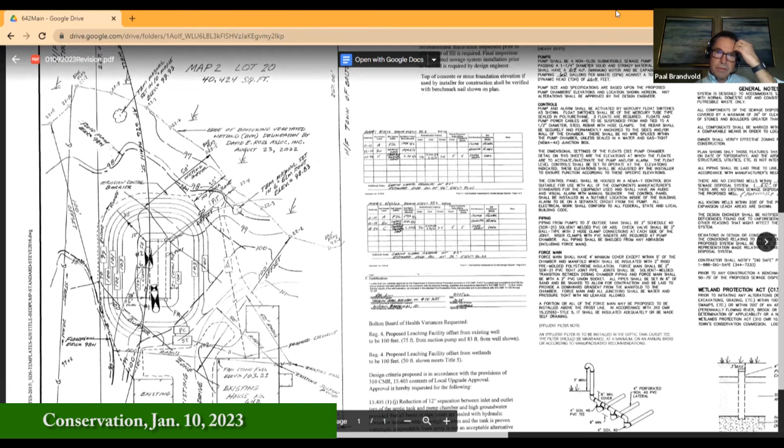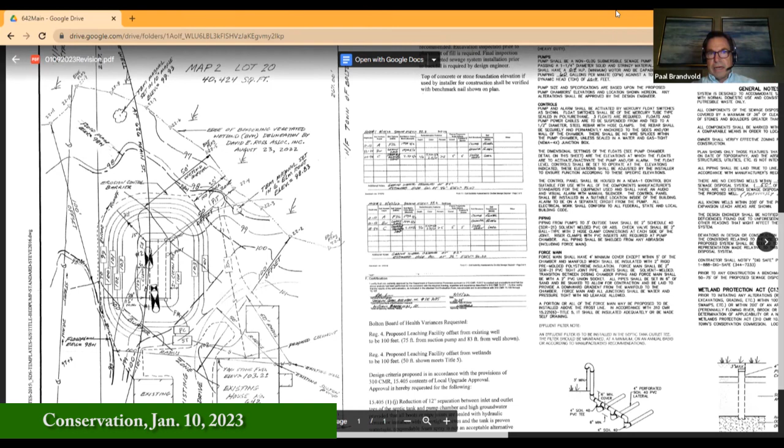Yeah, and I can just add, Brian, that when you look at this parcel, everything's within the 100-foot buffer, but the actual work is all outside of the 25-foot buffer, and the system itself, I think, is like 50 feet away. So there is some space there. I think it really comes down to the mitigation during construction would be my big question.

I don't know, Jillian, if you were on there, if you have any thoughts, or Rebecca, if you have a summary from the site visit? I wasn't able to attend. Okay, so the summary from the site visit is echoing exactly what they said.

I will provide one point of clarification. It's not part of construction, but they're decommissioning the pit, which is within the 25-foot area, so some remediation effort within that area is the only work taking place. But to that point, everything else is outside of the 25-foot area. There is the floodplain, and pretty much all the resource areas are really defined by topography on the site.

The only items I had asked on site about were continuing the erosion control barrier up to the garage, because the original plans stopped before the garage, and just thinking about limit of work and how the site may be manipulated during construction, where machinery will be ending up or any stockpiling material. It just made sense to basically close out that corner, because you're right on top of a floodplain area. So what I'm highlighting now is the extension that was put in. Yep, so that was included on the revised plans.

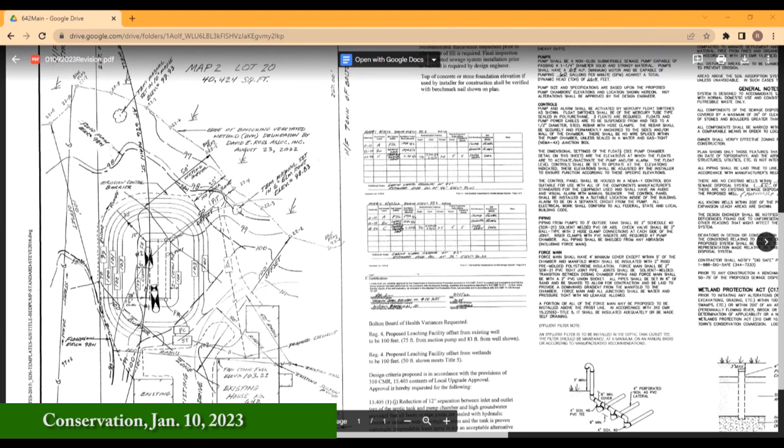Do I hear a second for that? Second. All right, all those in favor, starting with Paal, aye. Jim, aye. Jillian, aye. And Rebecca, and I as well. Who had the second? I'm sorry, I was still writing the condition. I believe it was Paal on that one. Yes. Oh okay, perfect, thank you.

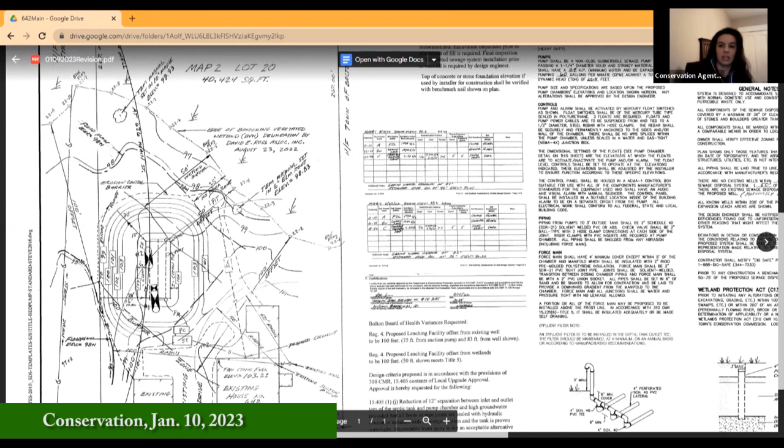All right, well, thank you very much. We appreciate you working with us on this. All right, thank you. Guys, take care. Thank you. How are we on time? You're good. Bye. I'll leave it out. Rebecca, it looks like we have about 2 minutes.

The only other update that I had was just that our volunteer land steward position is still open. And we are going to be starting, right now I'm coordinating the answers from the survey, the open space and recreation plan update survey, so that I will be coordinating a meeting, our first initial meeting, so we can start that process.

Have you gotten any feedback and or interest? I know we've announced the meeting and we're trying to get some people, but has anybody talked to you offhand that said, I'd be interested in doing this?

Yeah, actually, good, for the open space and recreation plan subcommittee, I believe we have a list of about 20 people who expressed interest in it, and about 10 of them responded to the outreach email I sent out asking for time and date availability. So it's encouraging. And then myself, the Parks and Rec coordinator, and the town planner, potentially the town administrator here and there, will be sitting on that subcommittee as well. So we have had some interest, and we may get more.

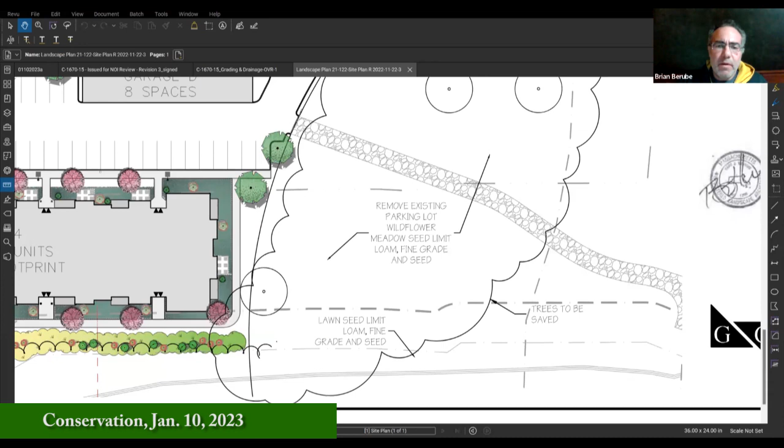So let me, if I may Mr. Chair, share my screen very quickly. Rebecca, if you could, thank you, and just confirm when you have that. I've zoomed in on it. This is the landscape plan that was submitted. You have it? Yep. So I'm just zooming in on that note - it is a wildflower mix. That's what we were proposing. So they are essentially affirming that.

Yeah, and I think the one thing we need to add to that is it needs to be a native wildflower mix or a native cultivar mix, but it has to be a native species - no invasives, no random wildflowers. That's fine, but Mr. Chair, you just said no cultivars. I'm not - I don't mean cultivars, I'm sorry.

Pollinators, native pollinators, native wildflowers - anything native is the key word that's missing. That would be great verbiage to add as a condition to reinforce this plan, and that's certainly fine by us, should you be willing to entertain it.

I'm sure you guys are amenable to that. Well, I shouldn't say I'm sure, but I'm assuming you're amenable. We are - you are sure, and you are correct. All right, good.

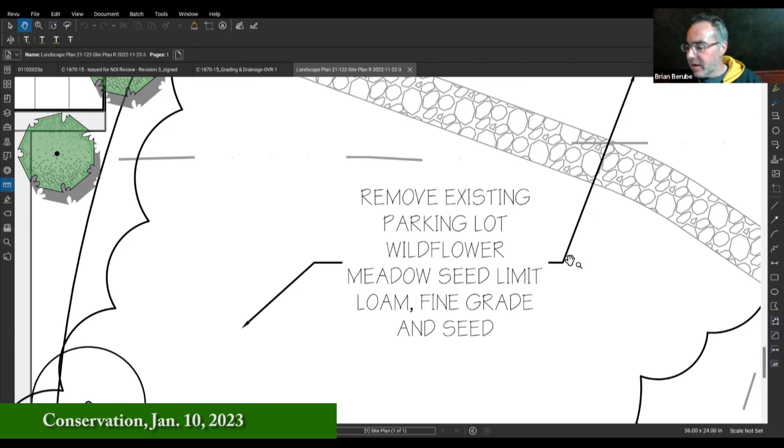I guess the only really outstanding thing for me, and I'll turn it over to commission members too, is that fire pond question. It's a tough one. If MEPA was so black and white on that, it kind of scares me, but I can see where that could have been an oversight. I know it is necessary - there's no way we don't need some sort of fire security there, and I don't know where else that could possibly happen.

I'm just saying, more to other commission members, having heard this whole discussion so far, I think I'm comfortable moving forward with it, how it's been drawn out. But if other commission members want to take time to either talk to MEPA or read through everything more, I'd love to hear your thoughts on it.

Could I add one thing before you open it to the commission? Just again, for clarification, the applicant does not need that pond as part of our fire management - we will have our own storage tanks. That pond is for the Bolton Fire Department now, or going forward, it will be only for the Bolton Fire Department for regional firefighting. So just to clarify the usage, it is not by us, it's by the town.

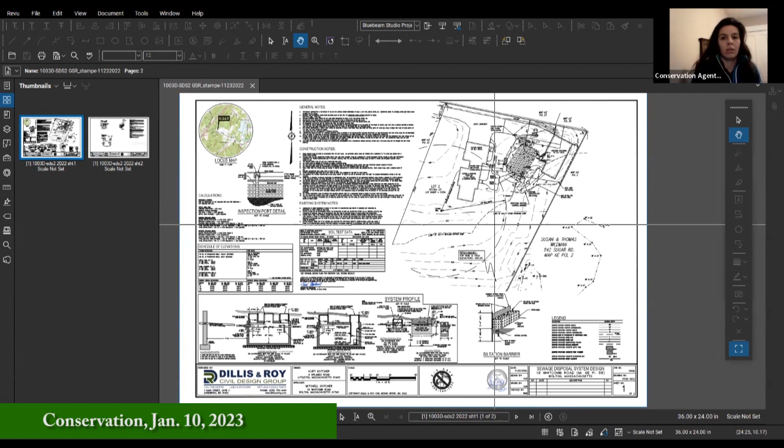Okay, can you see that screen, the plan? One second here. Okay, yes, we can see it, Greg. Okay, everybody can see that. Okay, great. So the applicant, again, as you stated, is Mitch Dutcher. The property is 19 Whitcomb. The existing house was built nominally 10 years ago

with a well and septic system. Mitch approached us a few months back, interested in building a garage structure in the back corner of the property, which is located within the outer limits of the buffer zone. I'll go over that in a second, but I just want to give you an overview of the site.

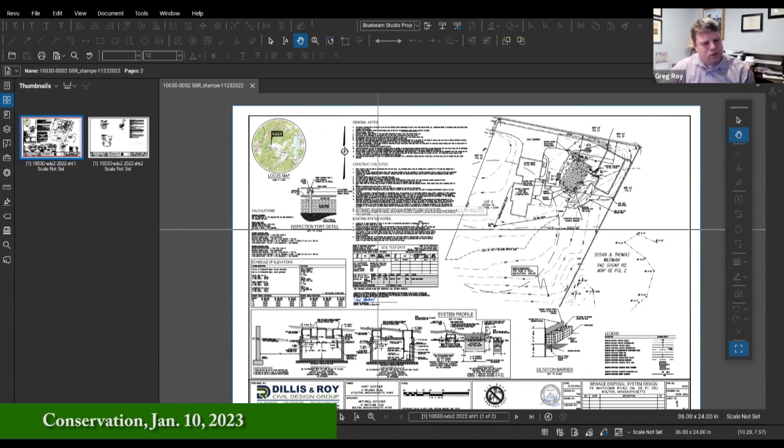So it's a little bit difficult to see here, but Whitcomb Road is actually over in this part of the site, and Sugar Road is down on the bottom of the page, oriented on the plan view. The lot actually has frontage on Sugar Road, that's where it derives its legal frontage, but there's an access easement for the driveway that comes in through the abutting property, the Damon property. I'm not sure the address, but that's why it has the address off of Whitcomb Road, just for everybody's benefit. So if you were to take Whitcomb Road, you would pass a house on the right, and then the driveway would be the second right as you go into Whitcomb Road, just so you can visualize that.

So the applicant, I'm going to zoom in here. The applicant is proposing to construct a garage building on the property with an associated driveway access in this location here.

The proposed structure would actually be over where the existing septic system is. So this project will necessitate the construction of a new septic system.

We'll have to relocate the leaching field to accommodate that construction. The location of the barn, as shown on this plan, required a dimensional variance, and the applicant has already secured that variance through the Zoning Board of Appeals. So that process is done.

As I mentioned, we also need a Board of Health sewage disposal system construction permit, and that application is also pending before the Board of Health. We did some additional soil testing back in late summer to facilitate the relocation of the system, and that application is before the Board of Health currently.

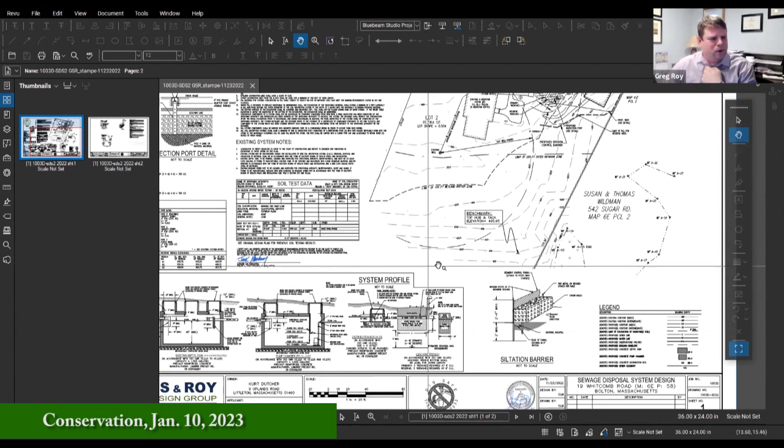There are two resource areas in play here that impact the property. If you picture driving down this location of Sugar Road, there's a perennial stream across the frontage of this property, so there's an associated riverfront area. It's located along this large dashed dot line here that comes across. You can see here I have the limit of the 200-foot outer riparian zone.

All of the work we're proposing for this new project is located outside the riverfront area. So although we have riverfront area on the site, we are not proposing any work within it. I just wanted to note for your reference that we do have riverfront area on the property.

There's a wetland system, some of which exists adjacent to the stream, and some off-site. You can see these wetland flags here, A17 through A23. It's wetland flags A21 and 22 that really caused the buffer zone to overlap the proposed work area. The closest point of the barn, I believe, is about 75 feet from the wetland area.

We would of course be proposing an erosion control barrier, which is shown in this heavy dashed line. No, here—that's not us. Okay, heavy dash line here.

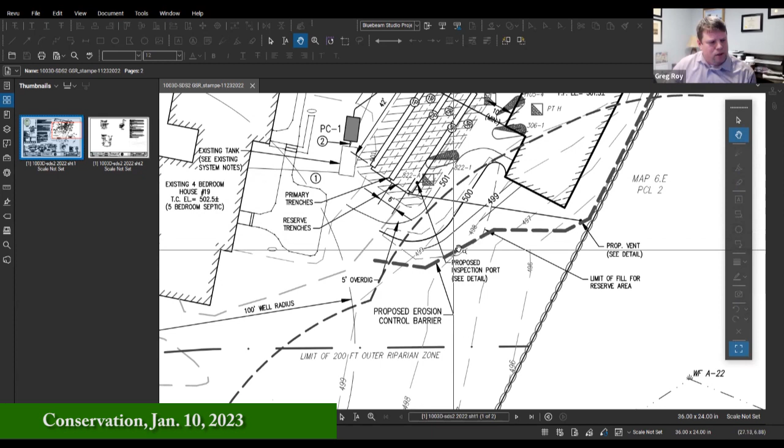A very small amount of the breakout grading from the new septic system, between the erosion control barrier and the limit of the buffer zone, would also be within the buffer zone area, but none of the leaching system components would be within it. So all of the leaching trenches, both for the primary and reserve area, would be located outside of the 100-foot buffer zone.

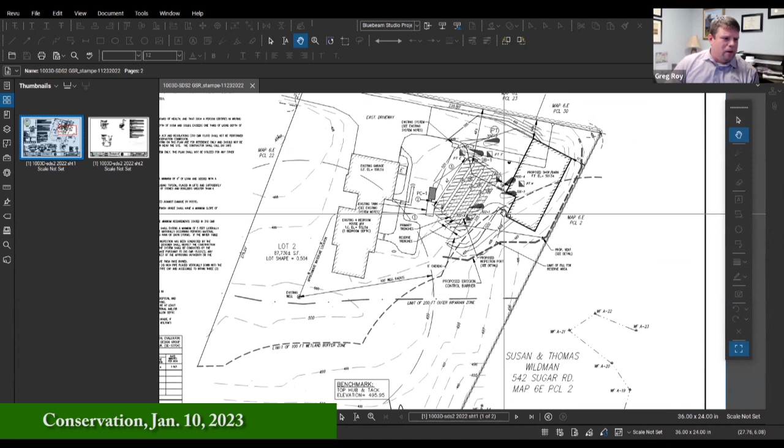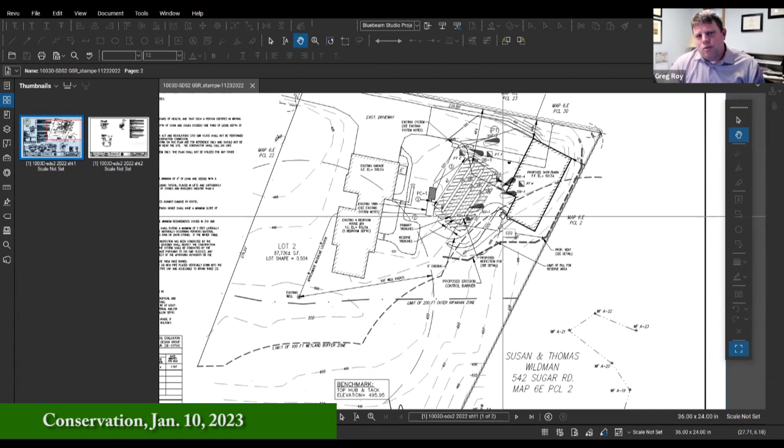That's a general summary. We did receive the DEP file number for this project, it's 112-0723, and we did not get any comments from DEP relative to that file number. So I wanted to leave it at that, Mr. Chair, and I'm happy to take any questions that you folks have or any questions the public may have.

Sure, I can start with this. Could you, I know you can't highlight on your map, but can you point out with your cursor on the map where the existing septic is right now? Yeah, I can highlight it. Hold on one second, let me just switch over to markup mode here and get a highlighter.

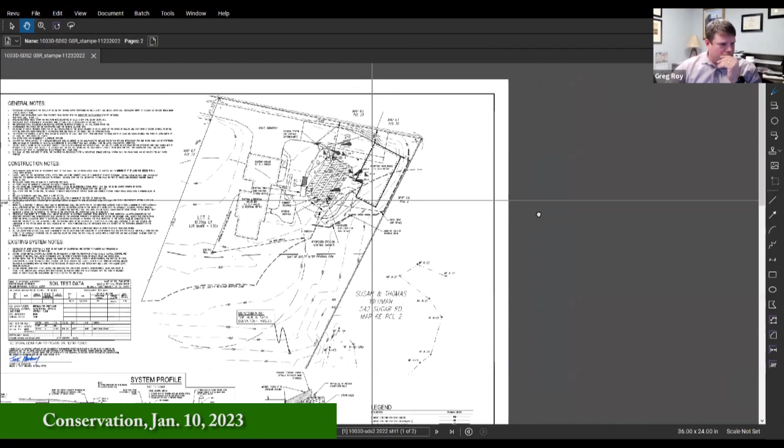Okay, the existing septic system is two trenches, Brian, and they're right here, right in there. Gotcha, so those are the existing leaching field. You can see that would be within the footprint of where the proposed garage structure is going. Yeah, so you're basically rotating it, putting it—okay, yeah, exactly, right. So the new leaching field is right in here like that.

I'm going to turn it over to commission members in a second. I'm not overly familiar with this property, and usually with something like this, especially—and I appreciate that you're outside the riverfront area—it's something we would do a site visit on, just to take a look. I know we have to mark certain things out, but for me, if you could flag the corners of the barn, basically where the barn is going, it looks like you flagged the wetlands. I think that would help, and if you could flag where the buffer zone kind of cuts through it. But basically flag out where that barn is going to be, and I can see where the wetland markers are. I guess those would be the big ones I'd want to look at out in the field. But that's all for me initially.

I'll turn it over to commission members. Any commission members have questions, comments, or thoughts regarding this project?

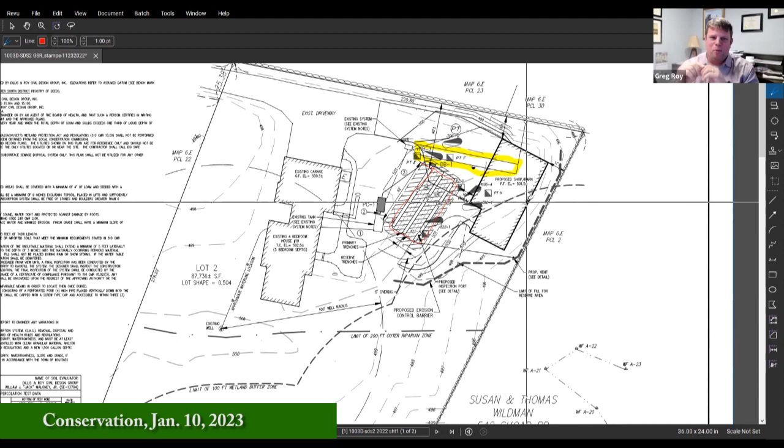I can get that for you. If we do schedule a site visit, if someone has that info at the site visit, that would be perfect, and we can reference it at the next meeting. Yep, absolutely, I can have that for you.

Already asked commission members, any members of the public here tonight to comment on this particular project or hearing? Yeah, this is Alison Morgan.

I'm an abutting neighbor. I'm just interested in understanding a little bit more about what the proposed erosion control barrier means, because I'm very aware of the stream that was mentioned and just wanted to know what that was, because the stream certainly flooded in the pre-Christmas rain we had.

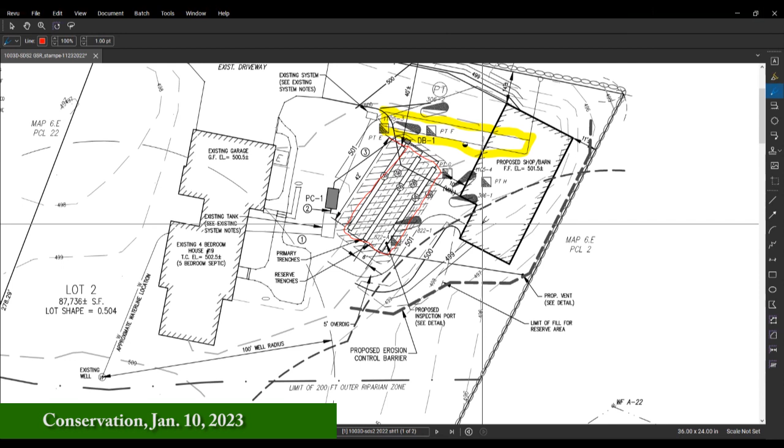Greg, would you be comfortable going through what you'd be using for erosion control? Yeah, absolutely. All of a sudden we switched from a drought condition in the summer to a rainy condition in late November, December. So I get that.

Let's see if I have a detail here... So we would be doing a treatment of hay bales and what's called a silt fence.

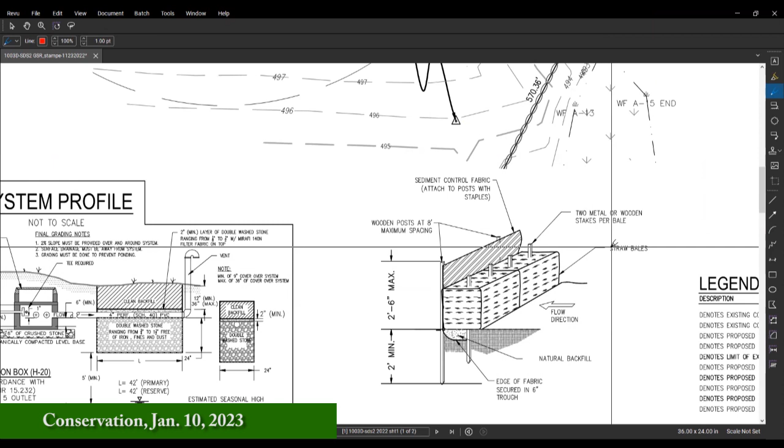If you drive along the road near certain construction sites, you might recall seeing some black fence, which is staked every approximately 8 feet or so. It sits about 2.5 feet or 30 inches above the ground.

So we would be putting two rows of erosion control protection along that barrier. There would be the silt fence, which is a woven mesh type of fence that's actually toed into the ground, so you excavate a small trench and backfill the bottom 6 inches of the fence into the ground. It sticks up about 2.5 feet.

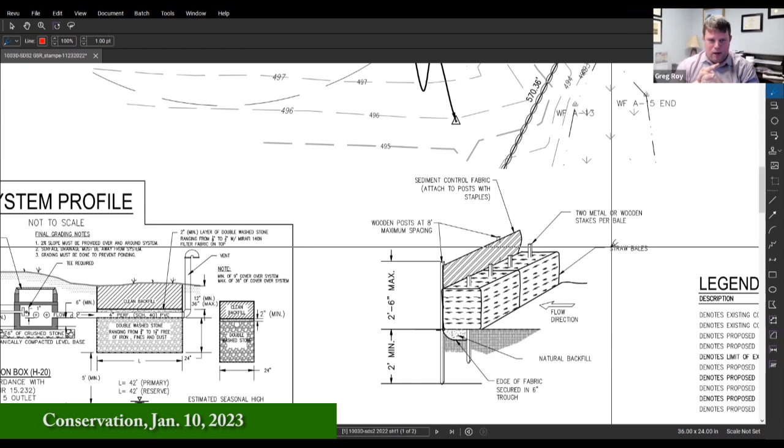And then adjacent to that, we also put a line of hay bales or straw bales that are also staked in place with wooden stakes. So that's a pretty conventional way of mitigating runoff and keeping any erosion from happening, from translating off the property.

So again, we'd be proposing that type of treatment along this heavy dash line here, which in addition to providing the erosion control will also function as a limit of work for the project. So it does two things: it controls the erosion, but it also functions as a limit of work on the site.

And to clarify as well, on projects that are permitted, this one's obviously in the process of review right now, the limit of work is defined by the erosion control barrier, as Greg just stated, but that's temporary during construction until that area is stabilized. It's not there permanently.

We typically have a condition, I think Bolton's boilerplate orders of conditions include a condition that once the site's stabilized and a final inspection is done by the Conservation Commission or its agent, that silt fence barrier has to be removed prior to final sign off. So it wouldn't be kept in place, only while the site is stabilizing until we get vegetation and stabilized soils.

I can quickly add to that too, that generally speaking, if we do issue an order of conditions, usual condition is that erosion control needs to be in place and approved by the conservation agent before any work can start. So it's sort of the first thing that's installed and the last thing that's removed.

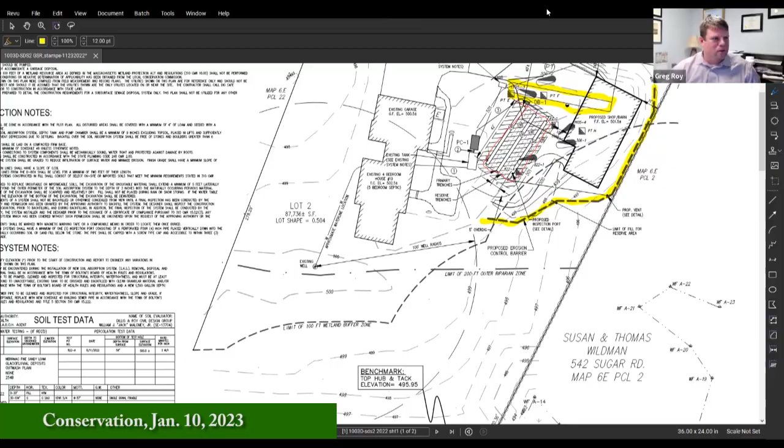Wonderful, thank you. Greg, if you could stop sharing your screen. Oh, sorry about that. That's okay. How do I get that? I've lost it, I kicked you off. Apparently I can kick you off. Oh, okay, good, you're all set. I lost my stop share button.

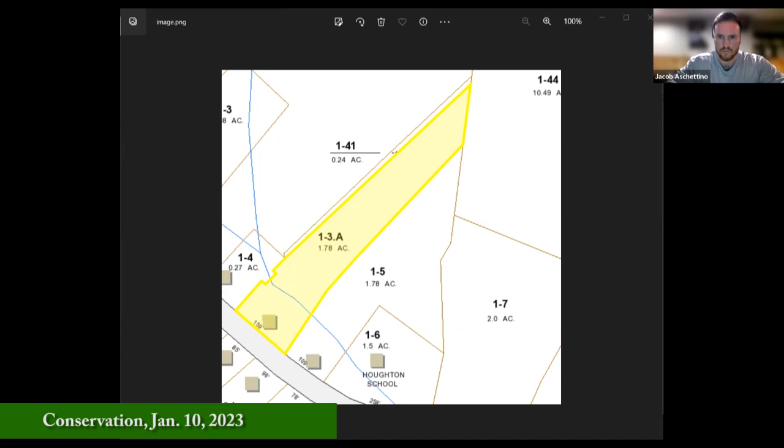So there's a small indent right here on the property line that curves in, and we saw that on the GIS map. All of these trees are right up to that indent, and then there's about 30 more feet until a culverted section of the stream that runs behind my neighbor's property. Once it gets to my property line, it's no longer culverted, it's open to the air. But these trees are about 30 feet before that stream, both on the GIS map and in the property itself.

So that's the project. We just want to remove these, stump grind them, and then in the spring we've already been talking about replacing them with something that equates to privacy hedges, trees, something that fits in this area that would be acceptable.

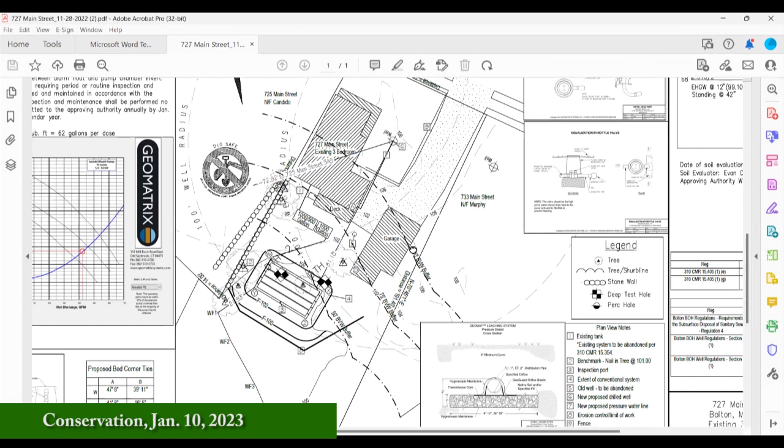The wetland on the interior here is a forested wetland. That's basically it. The entirety of the lot is within the riverfront, and this is within the inner riparian zone. However, as you can see by the constraints of the lot — it being a narrow lot, half the lot being wetlands, existing structures on it — there's really very limited alternatives, actually no other alternatives, to where you can put it based on the perc testing.

We are looking at doing a minimum 8-inch straw wattle here as outlined under what's known as box number 9, where my hand is, and it has plan view notes here that usually help with deciphering what is what on the plans. This in the riverfront takes up about 3.8% alteration of the total riverfront.

That's basically it. I'm open for questions or anything else.

Once again, we can appreciate the size and location of the property you're working with, and I know there isn't much room to work back there, and that any kind of septic system put in is most likely a large upgrade over what currently exists. But I'm curious, Rebecca, have you been out on site here at all? And curious if you have any thoughts or comments. I have been out on site.

One point of clarification — a lot of people do this. On the plans, you highlighted the 75-foot BVW buffer as the 75-foot adjacent resource area. That is incorrect. The outer portion of the 75-foot adjacent upland resource area actually is the same as the 100-foot BVW buffer. So you would go from the outer 25 to the outer 75 feet, and that would reach the same. So just a point on this particular site. Though, I think it is very important to include that 75-foot because it is such a very tight site, so the commission can understand. I appreciate you keeping that on there. I just wanted a point of clarification.

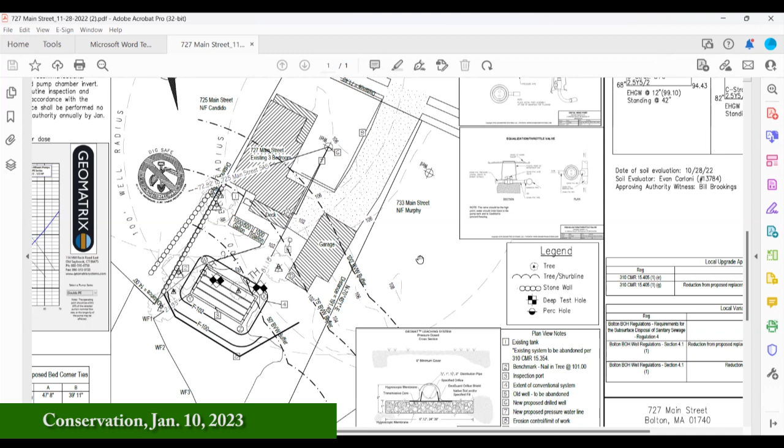Yes, I understand that, and that is typical. If you were on for a prior meeting, the commission is actually allowing that on another site, but rather they're abandoning it, sort of filling it and decommissioning it per se. But that pipe in particular, because it goes directly to the brook, that's the piece that I'm most concerned with, and that should not just be abandoned in place, that needs to be removed. No, we will have that removed under the enforcement order. That was what I did not see in the notes, so that's why I brought it up.

Okay. I'm not sure that I have any additional comments or questions at this time, but let me ask, do other commission members have any questions or comments regarding this particular project? Nope, not seeing any. Are there any members of the public here tonight to discuss this particular project? I think I'm not seeing any. Okay.

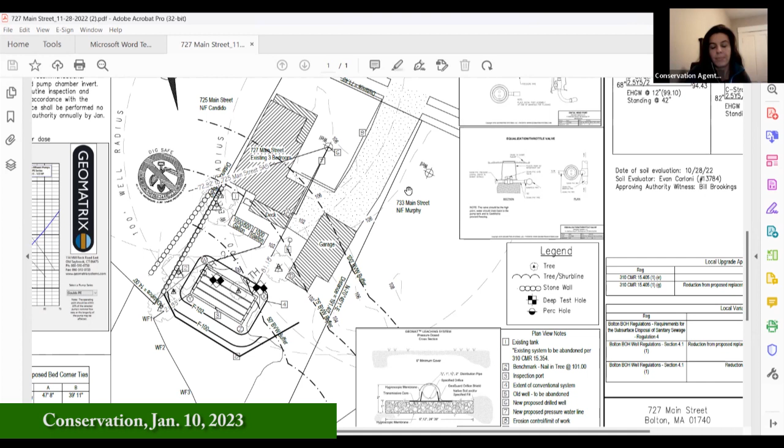So Rebecca, basically, as this has been submitted, it looks like it covers most of what we would require. I take your point about the existing pipe, but it sounds like we're basically covered under the existing enforcement order, that needs to be removed in that, so we don't need to make sure we add it to these conditions. I don't know if...

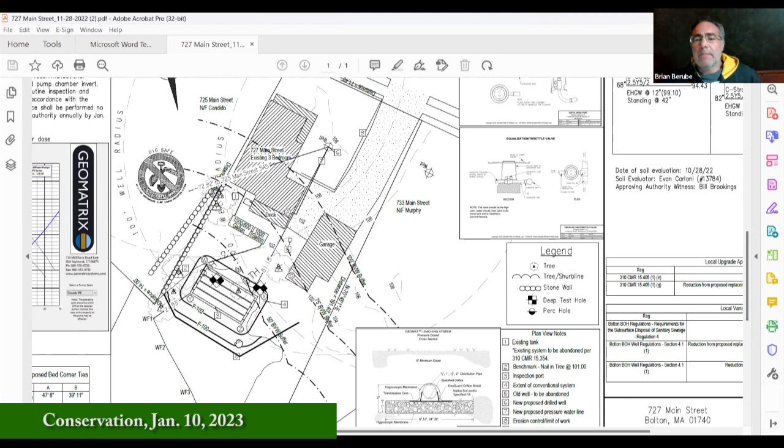It is worth, well, I would say usually we do put in a condition, it might be in here, I've not read through all of these, where the erosion controls need to be in place and approved by the conservation agent before work can begin. If these aren't on these plans, it's probably a condition I would recommend we put in. But I'll open it up again, any commission members, comments, thoughts, questions? All right, so not seeing any.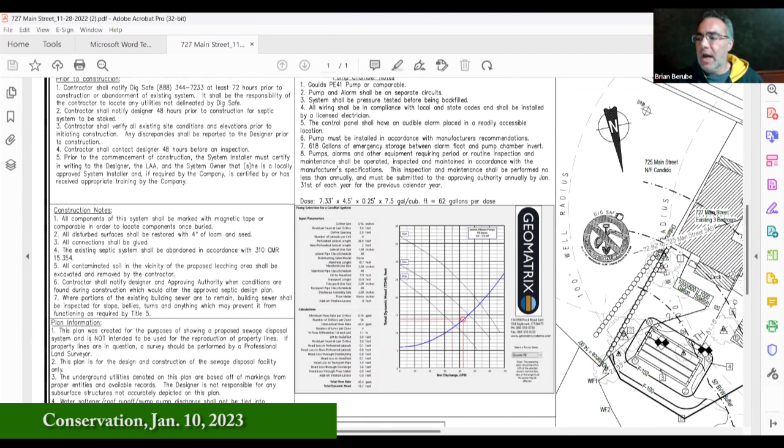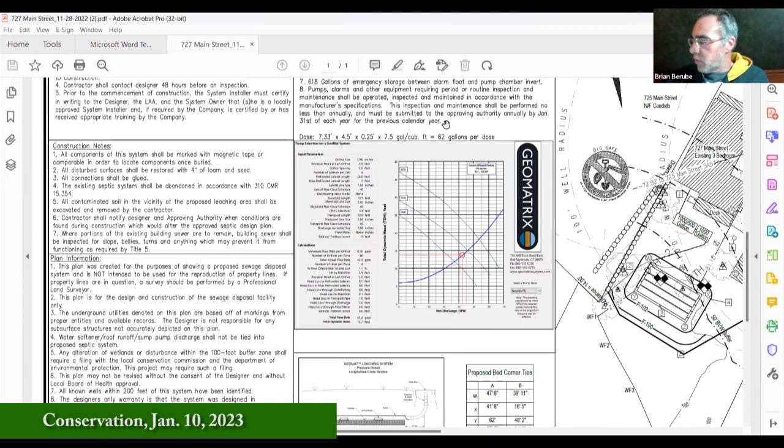I'd like to make a motion that we close the public hearing for 727 Main Street, map 1, parcel 34. So, what do we do next? I'll give you a call and explain that to you. Is this going to delay the project further, since they haven't made a decision yet? The chair is getting to that. You have to close the hearing before you make a decision.

If you were present for the end of our last hearing, the same type of thing came up. So say we agree to it and put it out to a vote. Then there's a 10-day appeal period where any member of the public can appeal it. At the end of those 10 days, you can begin, if that makes sense.

All right, so in that case, I'd like to make a motion that we close the public hearing for 727 Main Street, map 1, parcel 34. Do I hear a second for closing? Second. All right, all those in favor, starting with Paal, aye. Jim, aye. Jillian, aye. And Rebecca, I'm an aye as well.

I'd like to make a motion that we issue an order of conditions for 727 Main Street as drafted, presented, and discussed at this evening's meeting, with the additional condition that erosion controls need to be in place and approved by the town's conservation agent before work can begin. Do I hear a second for issuing that order? Second. All right, all those in favor, starting with Paal, aye. Jim, aye. Jillian, aye. And Rebecca, I'm an aye as well.

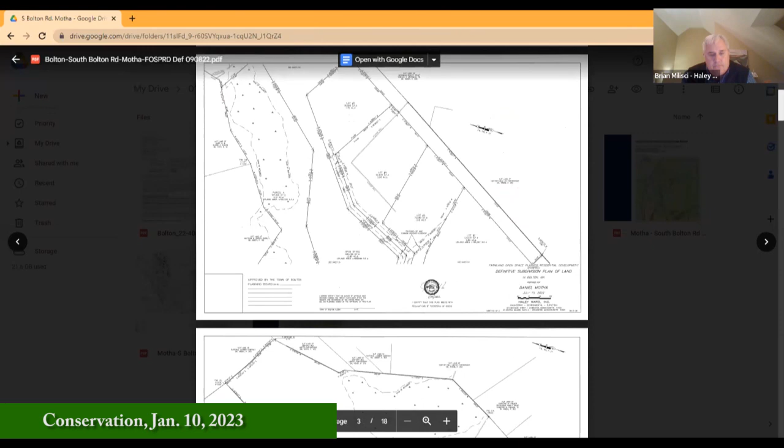All right, is everyone able to see? One moment, this is the... so for the site visit - Brian, I'm going to mute you for right now from Haley Ward because you have a little bit of background noise going on. Thanks, okay, sorry.

So myself, Jim, Brian, Matt Morrow, and Paul were out on site, and we walked through the site, essentially coming off of South Bolton Road, walking towards the rear. We did not make it all the way to the opposite side, if you can see my mouse, of this wetland system here, this back corner, but we did make it up to the ridge over here.

Interestingly enough, probably about where this solid line that cuts across on the plans, the darker solid line there, is a row of snow fencing and some Bolton conservation boundary markers. We were surprised by this. I don't have clear information, and it didn't seem that Brian had been able to locate any information either on why that was located there, potentially from a past project or maybe from the adjacent property for some reason. So I am still looking into that, but I couldn't find a direct answer in particular to this project, I don't know.

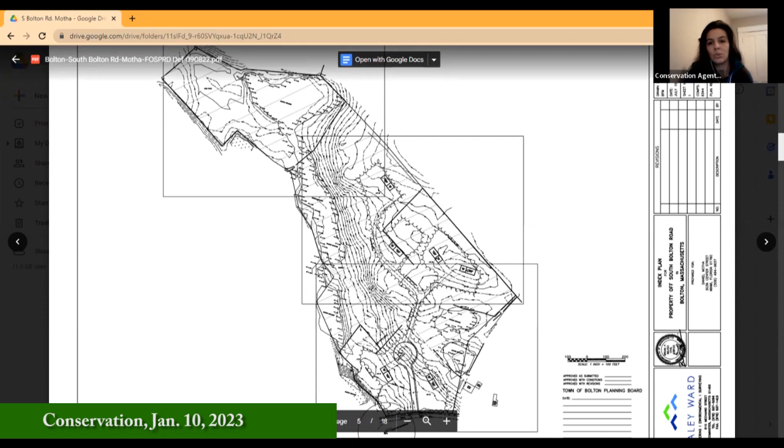I think it is relevant just to make sure that there's nothing on the property. I'll let Brian speak to what he looked at and maybe what he found, or his process of looking into that, in a moment. But it's important to note that that portion of the parcel will become open space, or they are proposing to have it become open space and potentially held by the town or a conservation restriction. So no development is proposed past that snow fencing, but I think it would be helpful to get some information on it.

That being said, we did walk through and took a look at the resource areas. I did not have any question as far as the way they were delineated. I think Matt Morrow did a good job. And in addition to that...

Excuse me, I don't have my directional here, but to this side of the site, we have wetland resource areas that were a little more difficult to delineate clearly because they're not as well defined by topography, but they were defined. I don't have a question with how the flagging was placed. This larger wetland system here that feeds off site, I also don't have questions on how it was flagged, because that was primarily driven by topography and hydrology on top of the other wetland indicators. Matt was present if we had questions, and we didn't have any significant ones.

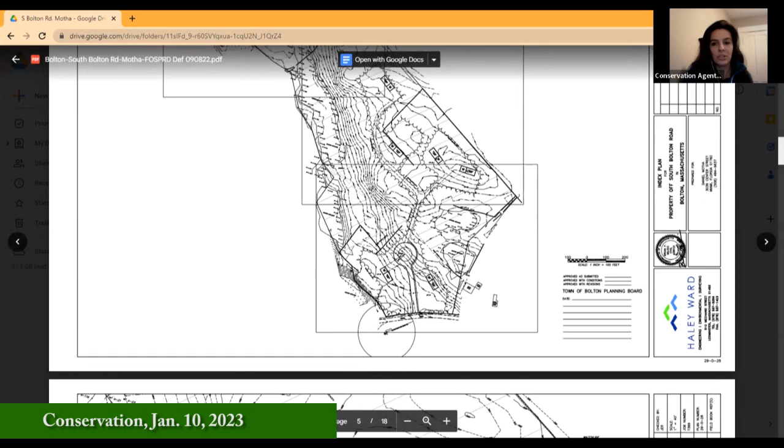There are some monitoring wells throughout the property as well. There was a clearing back here where it seems someone has created a shooting range, so I would just say if that's being considered for open space to the town, to remove that. If it's part of the lot that's being developed, that's at the discretion of the property owner and out of our jurisdiction. But in terms of where the houses and driveway are going, I think the applicant is doing a sound job of keeping things outside of the jurisdictional area to the best of their ability.

The other comment I'd make, I did send a message to the applicant's representative earlier inquiring whether they were required to do a MEPA review or filing, and any insights from MESA. I asked for a timeline on that, since the commission typically likes to reference any natural heritage, MESA, or MEPA conditions within any potential orders of conditions, as you've seen already in the process this evening. They were unsure of a timeline on when they'd hear back, but that's something to note that's occurred since the site visit.

I don't know if Jim or Paul would like to add anything about the site visit at this time.

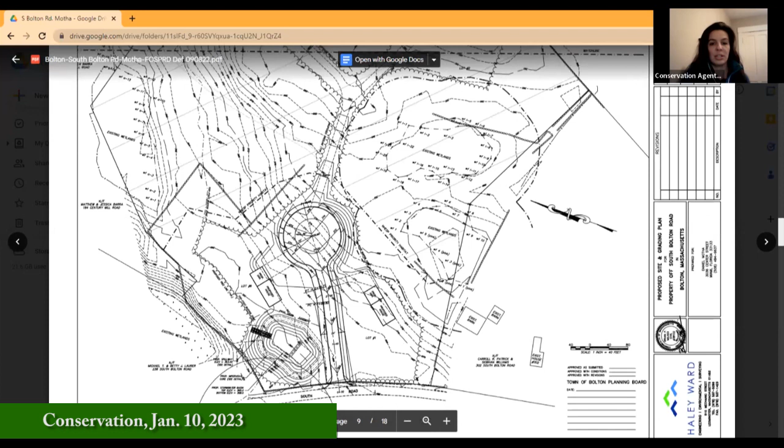No, I think you've done an excellent job capturing it all, Rebecca. Thank you. Yeah, I think the only other thing we asked about was tree removal inside the buffer zone, and I think we did get some information around that.

Right, thank you, Paul, for bringing that up. I had forgotten to mention that we did receive the tree removal plan that was submitted to the commission. I will note it wasn't submitted last Thursday by noon per the commission's requirement, so the commission may need more time to review that. I admittedly haven't had time to go through it as well as I'd wish. But we do have that document now, and Paul's absolutely correct that it was required of the applicant.

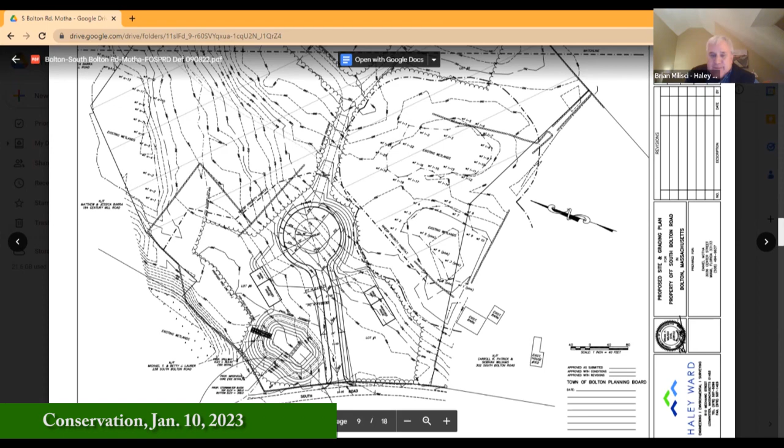And I know a couple of the commissioners were there for the site walk, but for those of you that weren't, it's not like it was 25 feet off of a property line, or maybe someone had gone a little bit awry. It was right smack dab in the middle of the property. It's pretty strange.

Well, yeah, I was going to say we'll continue to explore that mystery. I could see us possibly putting in some conditions about removing it.

Yeah, and I guess my concern in reviewing it, and not to talk too much about that this evening, because I'm hopeful that maybe I'll have at least until the next meeting to look into this a little bit more potentially. It just seems very odd, to Brian's point, because it's in the middle of this site.

So the only thing I could think of is that something in the initial project of Century Mill Estates was part of some conversation. It was never formalized, I'm not sure. Or someone was just way off.

I don't know if a volunteer went out there or one of the contracted parties went out and did this, because I do know some of the contracted parties on the adjacent property did put up some boundary markers and some snow fencing during different aspects of the process, at least since I've been here. So that was my concern, that it's part of something that wasn't documented properly.

But again, because it's part of what they're proposing as part of their open space, it meets the same threshold. So as long as it's not taking away from a different threshold on a different project, that would be the worst case scenario, which I don't think is the case, but that's really the true reason why I'd like to try and dig a little bit more on that.

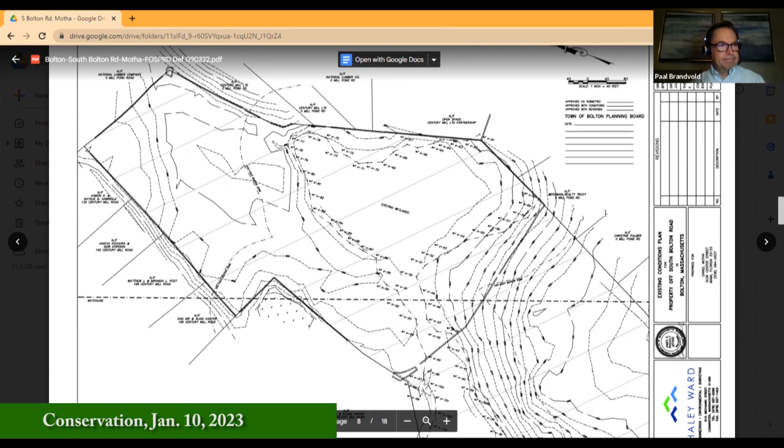Second. All right, all those in favor, starting with Paal. Aye. Jim. Aye. Jillian. Aye. And Rebecca, I'm an aye as well.

And just one last thing, I appreciate you guys letting me come late to class tonight. I got hung up at another meeting, and I appreciate you hanging on. No problem. All right. Thank you. Yep, oh, you're welcome. Take care.

As I started to say earlier, I think we've gotten through everything else on our agenda this evening. Rebecca, is there any open business we haven't gotten to? Nope. All right, commission members, any new business or funny stories?

Seeing none, I'd like to make a motion that we officially adjourn the Tuesday, January 10th, 2023 meeting of the Bolton Conservation Commission. Do I hear a second for adjourning? Second. All right, all those in favor, starting with Paal. Aye. Jim, aye. Jillian, aye. And Rebecca, I am an aye as well.

Wonderful, thank you all so much. Everybody feel better—for those who need some recovery time. Thanks, have a good night. All right, good night, thanks, you as well.